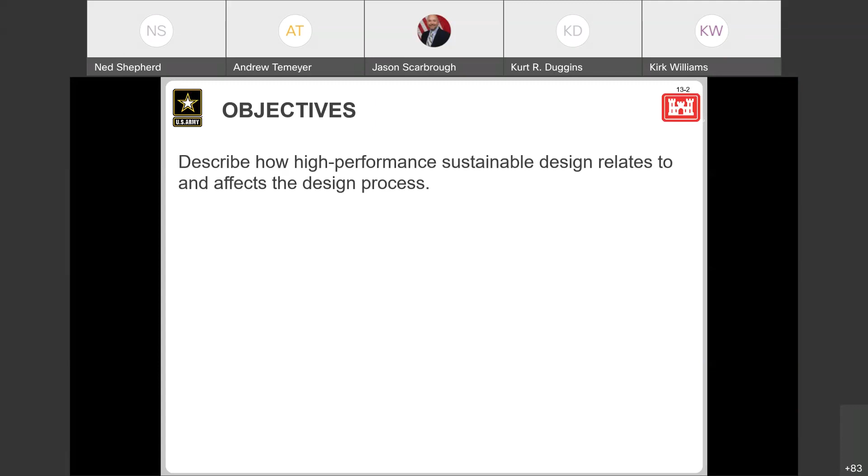As far as resources go, the UFC 1202 is your primary point of reference for requirements and criteria. That references the IGCC, formerly known as ASHRAE 189.1, and then you also have your energy requirements coming out of ASHRAE 90.1. For projects pursuing LEED certification, you have LEED and LEED Online. Then there's obviously also other third-party certification guides and tools, depending on where you're at.

We'll talk about AR 420-1, which serves as our overarching guidance for how we proceed through our design process. It's obviously got an Army focus, but we leverage that basic process on other services as well, like Air Force. There's the Mercy website, which we've talked about before, probably needs some updating, but it does have some good information in it. If you're working on Air Force projects, there's an AFI 32-1023 for designing and constructing military construction projects.

You don't have to be an architect to look at the Architect's Handbook of Professional Practice, but we consistently refer to these design phases as schematic, design development, and construction documentation. Those kind of came out of the AIA long time ago, so if you're looking to relate basic design process and theory, that's a good resource.

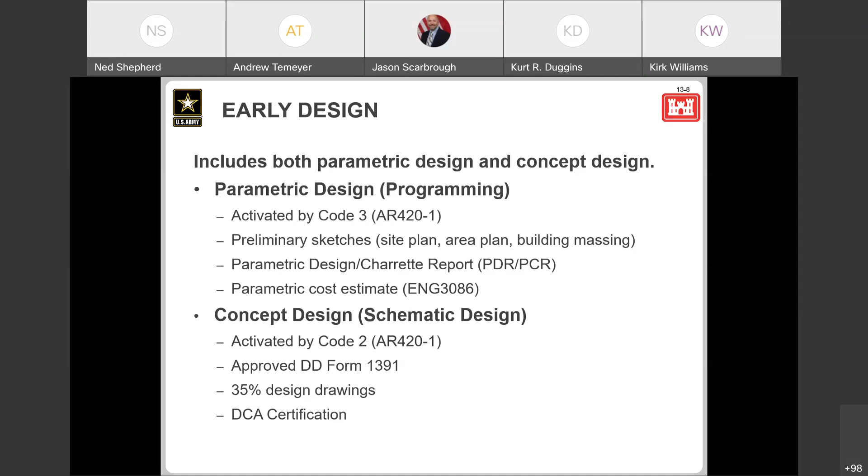When you're reviewing your programming goals, ultimately this is when we refer back to integrated design - we want to make sure that we have a robust and diverse team working on the project. Your programming shouldn't just be done by a project manager, or one person at the base. It should have a robust team, a diverse skill set that can vet and validate all of the project requirements and begin that integrated development process.

Conduct research as necessary to ensure that you have a project site, that you've properly placed your facilities on the site, that you've identified sustainable features and components that may impact your project scope or budget. Begin to think about low impact development and site development, and try to open the aperture a little bit on your project - see what resources are available within or around your project site so that you can make informed and intelligent decisions about how to best develop your project.

Set and prioritize goals. Every project is constrained by scope and budget.

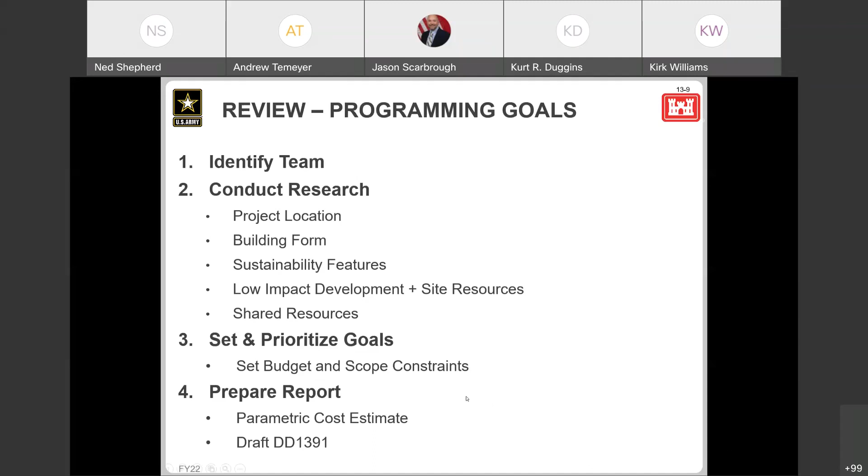When you're kicking off your project, sustainable design features and options need to be a part of the conversation. Here's some of the new, fancy, shiny, big, appealing things that everybody wants to be able to talk about. Everybody wants a windmill on their project, right? I don't know, I'm kind of kidding.

Make sure that sustainability is part of the conversation when you kick off your project. What can you do to reduce your energy consumption at the project level? What can you do to reduce your water consumption? There's easy things like low flow faucets and toilets, and then there's more complicated things like rainwater harvesting, purple pipe, all that type of stuff. So we're not here to tell you what to use or what to entertain or what to consider, but you need to look at your individual projects and generate that conversation as early as possible.

And it's not too early to start the energy modeling process. That's not to say that you have to have a robust Trane Trace model, or I can't remember the other one that we often use, but start looking at it in an iterative manner, working from general to specific, how design decisions impact your project in an energy modeling environment.

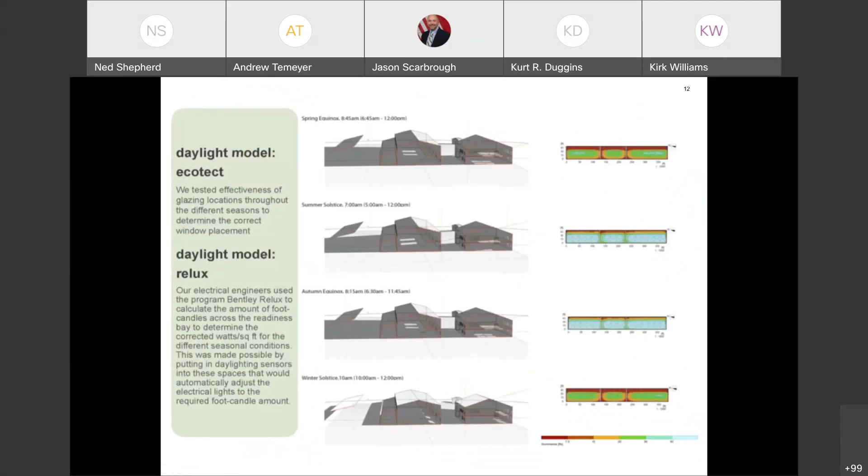Another example of daylighting using Ecotect, which is, I think, a dead software at this point in time, so maybe we need to update the slide.

Start working your third-party certification checklist. This is a LEED version 4 checklist, but most projects, the UFC dictates which projects require third-party certification. Army still is behind LEED, Air Force is not typically, but ultimately start tracking compliance with your third-party certification requirements. UFC is a very strong indicator of what you got to do on your project, but if you need to track LEED certification as well, achieving all of your required credits to get to LEED Silver is not going to be 100% coincident with complying with the UFC.

So you need to start taking a look at this stuff early and figure out where your gaps are, run a gap analysis, and try to establish where you can target credits that get you in the best position for that silver certification, and maybe factor in a little bit of room for error.

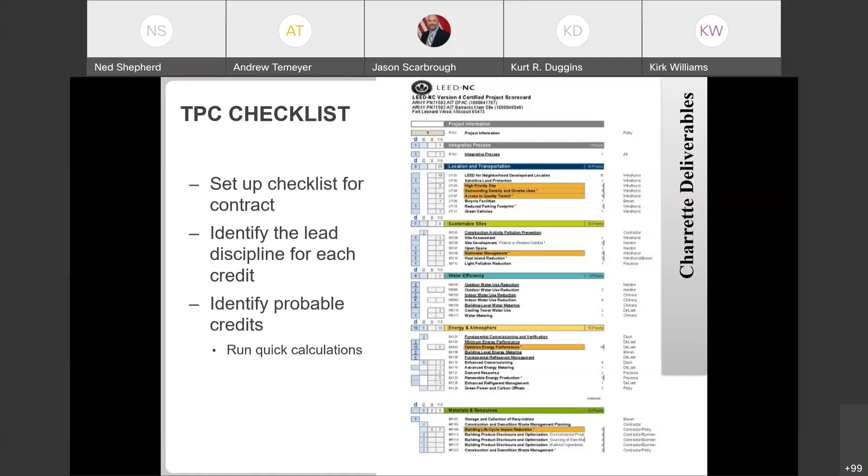Scorecard documentation - a lot of you might know of these as HPSB Checklist. Each service tends to have their own checklist. I think the Army and the Air Force ones are still posted at this link on the Whole Building Design Guide. The Army one is now a PDF, but it's gone through several different versions over time. I believe the Air Force one is still an Excel spreadsheet.

I'd say that the Army one, the degree with which those are being tracked right now is not necessarily what it was in the past. Air Force still pretty consistently asks for them when we execute their projects, but ultimately they should reside with the project files and be available if requested.

When you do your design charrette at the beginning of schematic design, make sure you retain as much of your PDT from planning as you can. Make sure that you're validating your project requirements against the 1391. At this point in the project life cycle, that 1391 is still a draft. Your budget shouldn't be locked. Track down your owner's project requirements. Maybe that's defined in your planning charrette report or your PDR, or maybe it's a separate document depending on the complexity of the project. And then also make sure that you understand your basis of design.

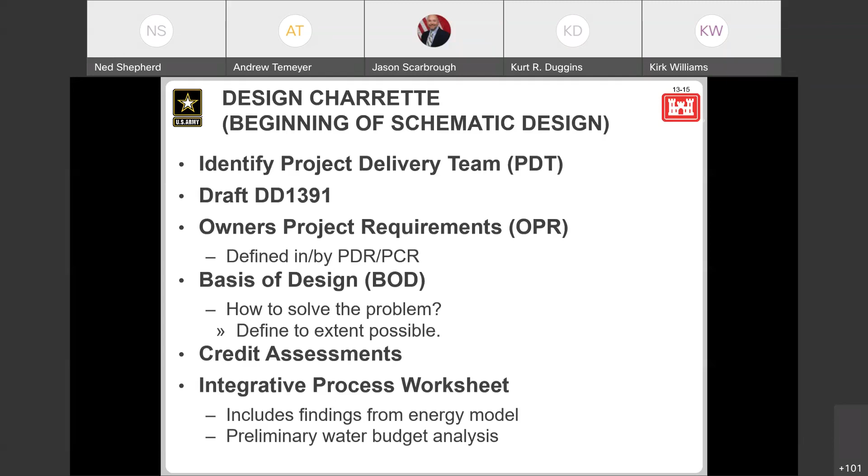Again, identify your PDT. Make sure you can retain as much ownership to that project within the PDT as you can. Make sure everybody has access to contact information. If you're doing an in-house design, that's great - a lot of times people are all sitting next to one another, shoulder to shoulder in the building. But this happened before COVID, and it's even more prevalent now - we work with remote teams across geography across the country, and we have diverse team member sets. So make sure everybody knows how to get in contact with one another. And then declare clear roles and responsibilities. Nothing drags a project in the gutter when nobody knows what their job is and what they're responsible for. Try to be clear with where those responsibilities lie.

We kind of have a couple of hot topics around our district. Who owns editing certain credits, who owns editing certain specs. Make sure that you know who's going to edit your sustainability spec or your sustainability reporting spec early on, so that it doesn't just get forgotten.

You should have your project manager. Make sure that they understand that sustainability requirements are a requirement on the project - they're not an option. Do what we can to make sure that they have the ability to communicate with stakeholders outside of your organization, and then provide them with the analysis and tools to help execute on project requirements.

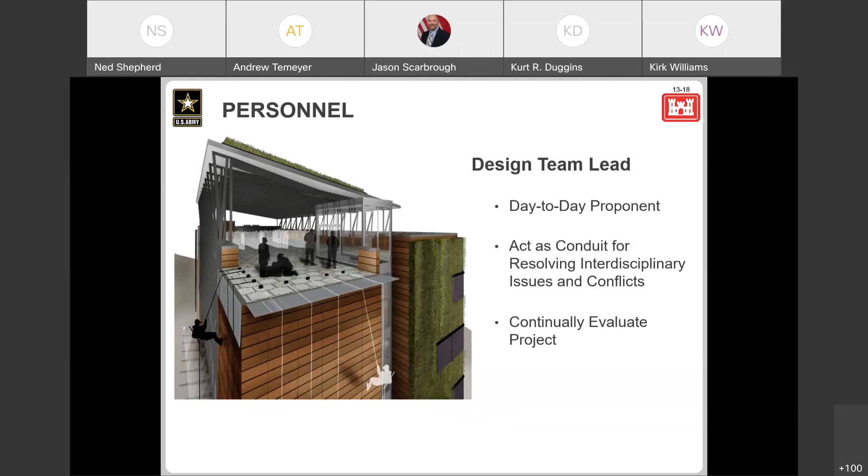I think sometimes this gets forgotten about. Make sure your design supervisory structure has an awareness of sustainability requirements on your project. Ensure that they have the best understanding. A lot of first-line supervisors may not be in the weeds on compliance with ASHRAE or compliance with documenting third-party certification, but it's an important part of the project. It directly relates to project success, and if your supervisory staff don't at least have a basic level of understanding of these requirements, it increases the risk that the quality of how you're going to deliver on that. Number one, it's inconsistent. Number two, it increases risk that you miss expectations. So do what you can to include sustainability compliance as part of your quality control procedures.

Review your energy model. Review any third-party certification templates or documentation that you've completed. Make sure that stuff is being done early and is being maintained, rather than forgotten about again until the last minute.

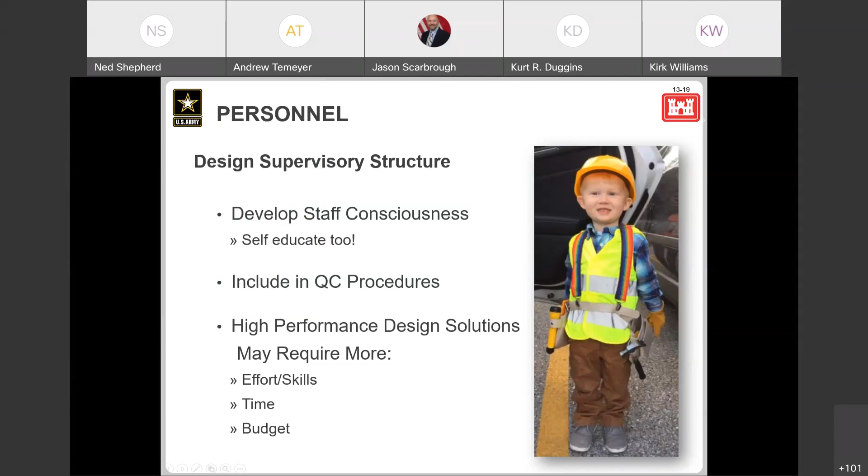But if you develop your project design at 35% to an industry standard level, that's defined by this AACE RP 56R08. You develop your cost estimate to that same standard, and then conduct, at this point I think it's all MILCON projects, FY24 and beyond, a cost and schedule risk analysis consistent with AACE RP 41R08. That allows the budget owner, the project owner, to go to OSD and adjust their project budget.

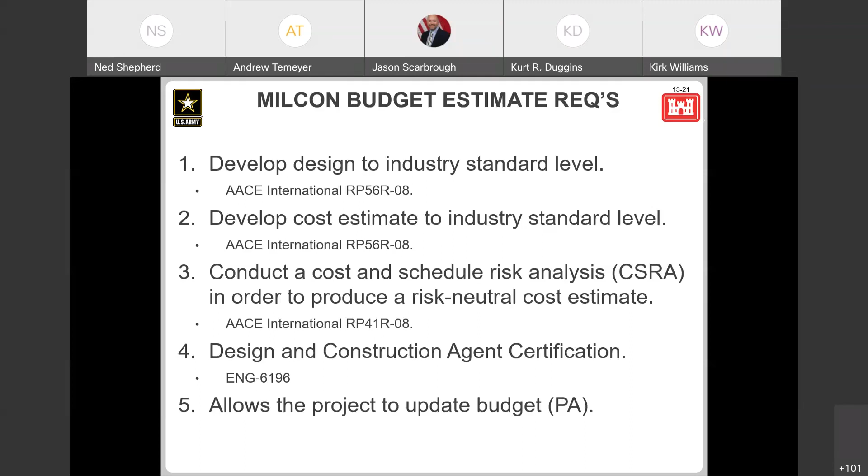But ultimately, make design decisions early. Start thinking about how your design decisions are going to integrate with other systems, and start running some interference on that. Think about, this is an example, but how wall color may impact your lighting strategy, how that may impact your mechanical room or your mechanical design or your mechanical room solution. Think about, in this case I think we're looking at a wall, how we're going to insulate it, and how electrical system routing and infrastructure can be installed within that wall assembly, and whether that has an impact on the thermal performance of your project.

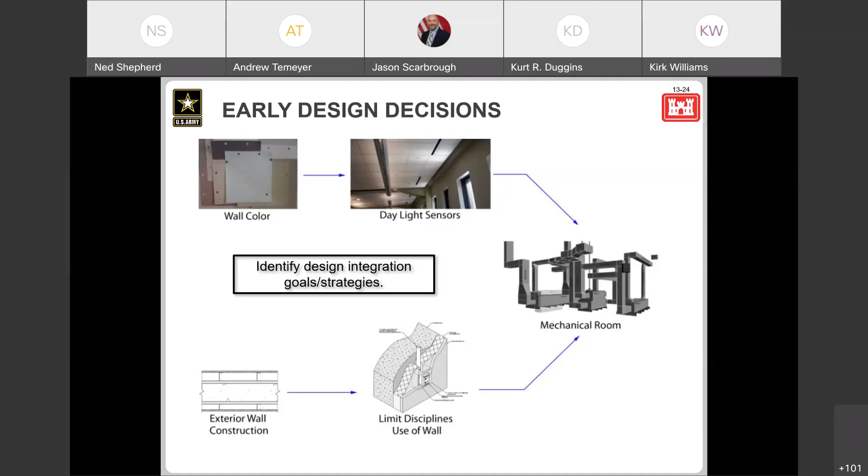Here's another example of an integrated solution: solar tubes. We've used these a lot within our district, but they provide a fairly cheap way to deliver daylight into spaces that otherwise may not have good opportunities for things like skylights, clerestories, or big walls of translucent or transparent fenestration.

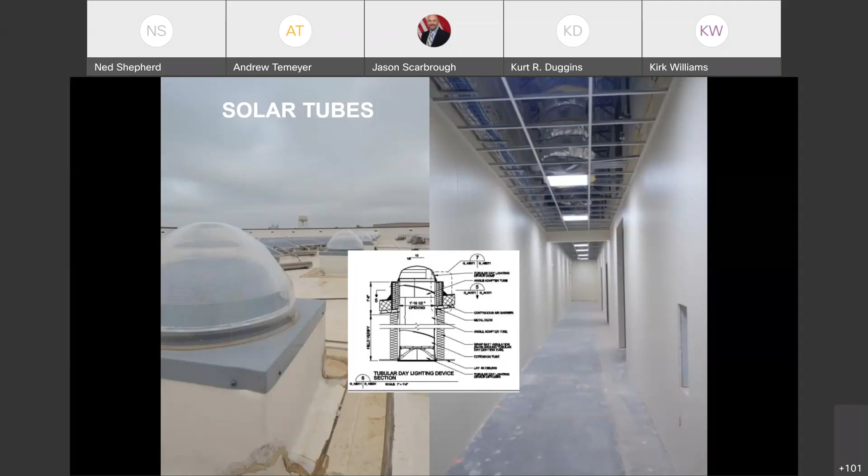All right, so as you wrap up schematic design, you should have your record card, your design drawings, and a design analysis. Your sustainability analysis may be part of your design analysis, but make sure that you're starting to document all of the commitments that the team has made in meeting minimum or life cycle requirements, and include any life cycle cost analysis that backs up your decisions.

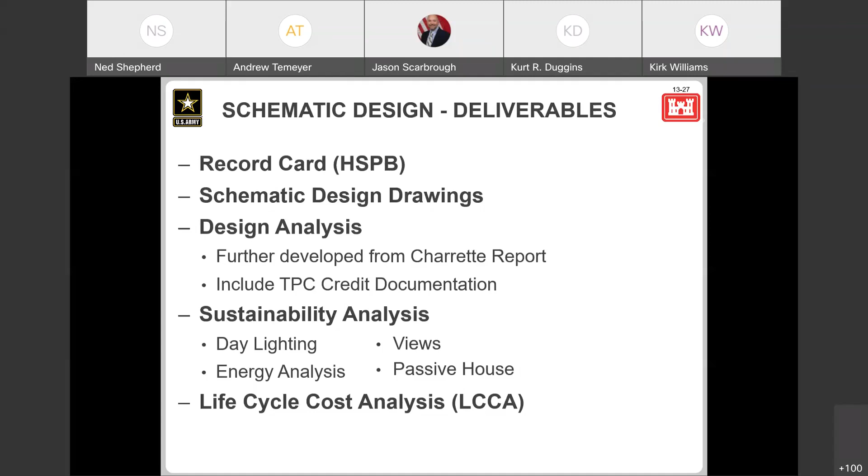Okay, so that puts us—I don't know if you guys can see my cursor very well—but that puts you right at, that puts you at the middle, or end, of your design year. That's where you're going to complete your DCA certification. Hopefully, if you did everything correctly, your service is going to be able to adjust their budget and set your project up to have the right amount of scope and money backing it.

That gives you actually a fairly luxurious timeline to awarding within your program year. That means that for design development and construction documentation, you usually have about an entire year or more to work the remainder of your design. Obviously, all of this is contingent on your acquisition strategy. I believe the OSD reporting requirement is the same whether you go design build or design bid build, but your remaining design phases may change from here on out.

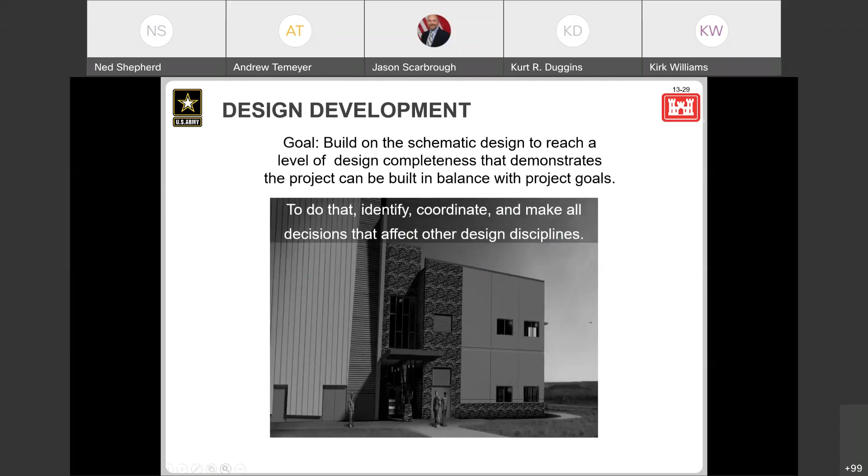Okay, so design development. Your basic goal during design development is to build your schematic design from a set of goals and a set of analyses into a coordinated solution that you can build, and run all of the coordination and interference checks that you can during this phase to ensure that you can produce a reliable set of design documents.

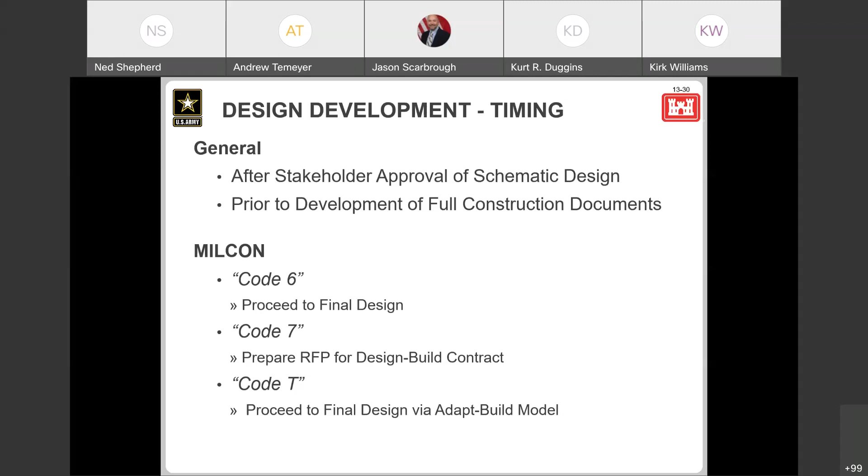As I was saying, this would typically be activated by a Code 6 for a 100% design or a full design, whether that's AE or in-house. Code 7 would be for design-build RFP, or Code T would be for an adapt-build methodology. But ultimately, your path to a construction contract award will obviously be different from this point forward, whether you go design-build versus design-bid-build. But ultimately, we're still going to be tracking similar goals.

I think it's important to say or be open to the idea that high performance sustainable design is more work than what we'd maybe label a non-high performance design methodology or process. The whole idea is that we spend a little bit more time in design to yield long-term payback for a life cycle cost-effective facility. That puts a burden on the PDT, everyone involved, whether you're doing design or project management, or maybe you're on the owner-operator side of the table. But ultimately, I think we have to be willing to say that out loud. That may mean you have to make difficult decisions on what you're going to focus on. Maybe your design budget isn't going to increase, but ultimately we have to be willing to figure out how to deliver on these requirements, knowing that it may require a little bit more analysis or effort to yield a successful outcome.

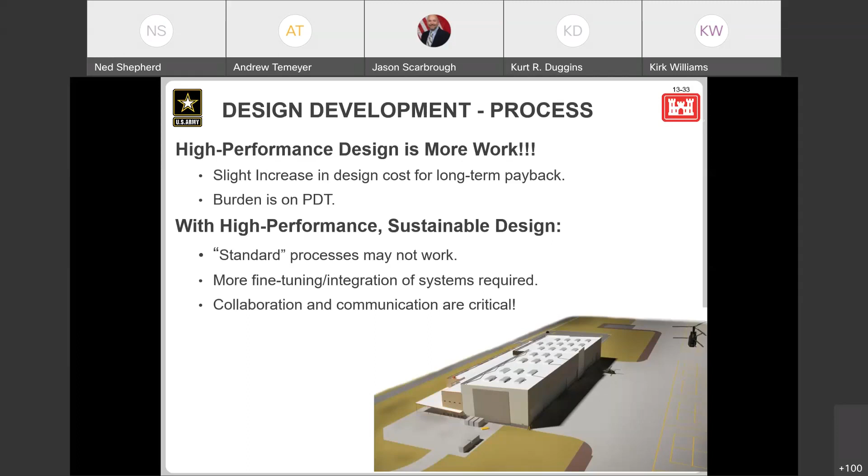Cycling back to the topic of integrated design, figure out what tools and resources may facilitate this collaboration process. Within Omaha District, we have a space labeled the BIM pit. It's not used as often, frankly, now that we have all of these virtual coordination tools, but figure out ways to get your designers in the same space, whether that's real property or virtual, and actively work coordination on your design.

Figure out, again, back to BIM, is BIM the correct tool to facilitate that? I would argue that it is, but there's all kinds of tools and resources out there available, and depending on what you're attempting to coordinate, use the best tool for the job.

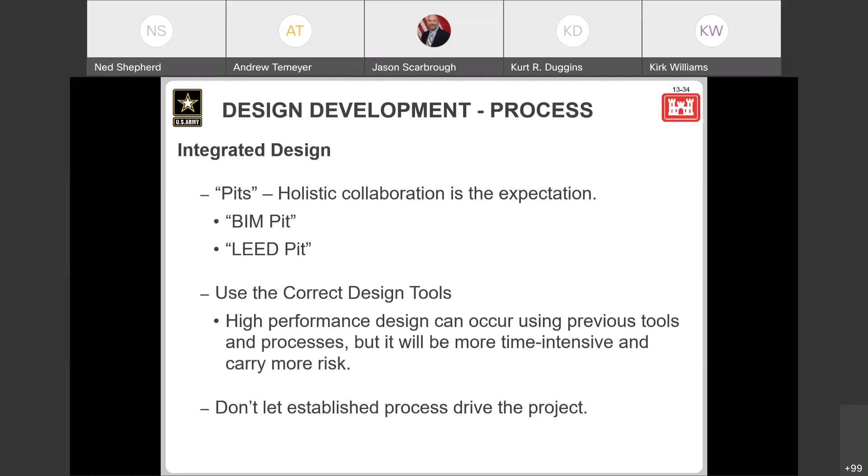We already talked about BIM. I think most districts at this point are probably using BIM, whether that's a Bentley or an Autodesk product. This is not a sales pitch for one piece of software or another, but again, the whole concept of BIM is that you're modeling a facility in virtual reality. I think it's pretty well understood at this point in time that utilizing BIM typically requires a pretty front-loaded effort, similar to the entire process that we're talking about, to feed that environment with all of the inputs that are necessary so that you can facilitate an integrated and coordinated design process.

I think depending where you are in adopting BIM within your district, you may feel like the payback isn't there, but I think the more and more that you learn how to take advantage of the BIM process, you can start to realize benefits on the back end for reduced errors and omissions, for opportunities for, I don't know, use a flowery word, synergies in design detailing or design systems or in systems coordination, things like that.

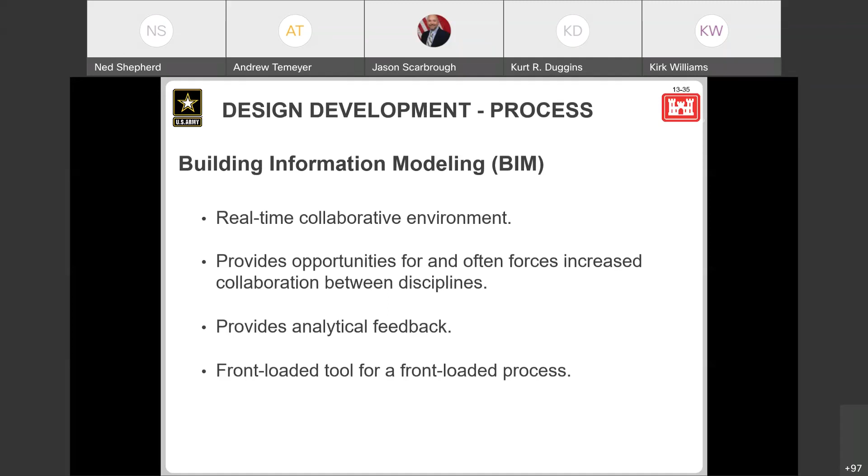Okay, so you're going to circle back to our energy modeling. You're going to finalize your concept models, start working your compliance models. Those may or may not be developed within the same systems. The same people may not be responsible for those. Not going to dictate who those are, but all of a sudden you're starting to transition focus on using energy modeling to make design decisions, to facilitating energy modeling to show compliance with all of the requirements that we've established.

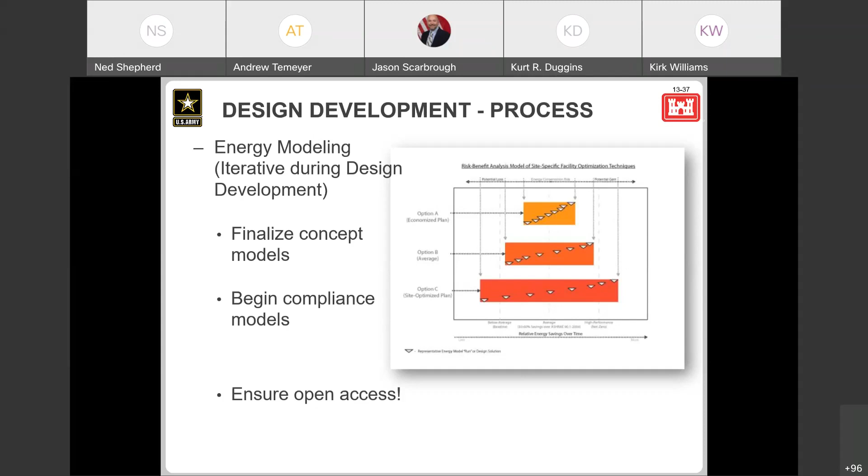And try to make sure that those models are available for the entire PDT, whether that means it's outputs or summaries or tables or whatever. Make sure that the whole team understands the inputs that are going into those so that they're as accurate as possible.

Design development, I think with the increased focus on high performance design, it's worth asking the question, how do we present the work we've done? I sometimes feel like you can go through this whole phase, do a huge amount of coordination, make a lot of decisions, and then you find yourself burdened with, oh, I'm trying to meet my standard 65% design deliverable requirements. And I don't feel like I'm there yet. You just put all this time into building a BIM model, but you don't feel like you have the correct output.

Again, not here to dictate what your deliverables are, but I think it's worth thinking about, and maybe drawings specs and a DA aren't the best ways to communicate that. How do you reconcile the expectation for what everybody considers to be a standard 65% deliverable versus giving the PDT and your stakeholders the best information they can have to show what you've done in order to meet their requirements?

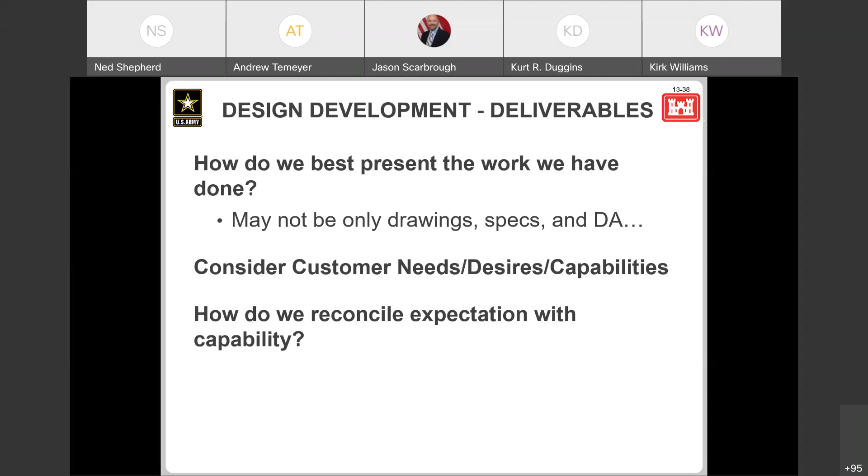If you had to put a finger on what your standard deliverables would be, it's probably a cartooned construction document set, so you're getting a handle on how many sheets you need to communicate what you need to communicate. You're starting to pull individual specifications, compiling and editing them, and have a design analysis that addresses all your sustainability requirements. You're starting to select features and products or performance requirements for products that go into your project, and then updated scorecard or HPSB checklist.

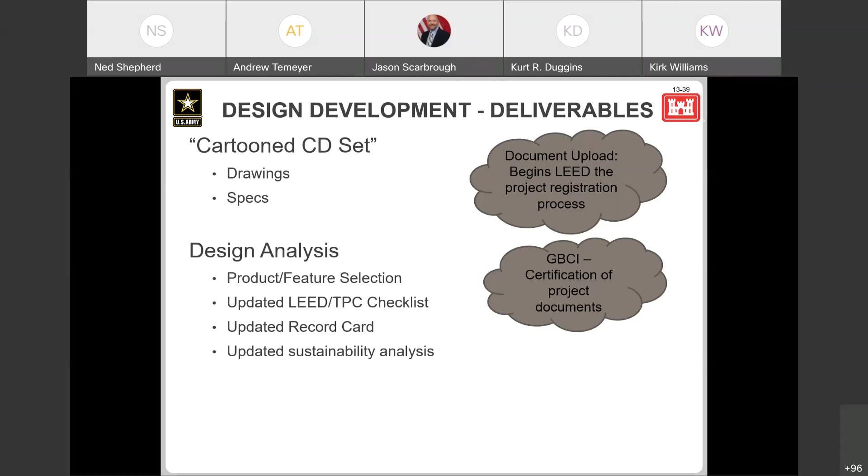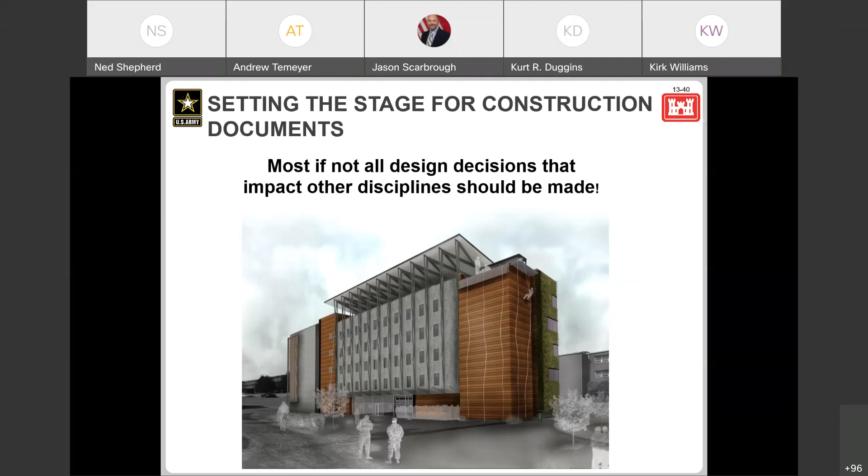The overarching goal through design development is that you're making all of your design decisions that impact other disciplines during this phase. That translates into, as you transition into construction documents, the construction documentation goal: compile and complete contract documents with enough detail that they can execute a construction contract. This may seem overly simplified, or completely unrealistic depending on your perspective, but ultimately the goal is by the time you hit CD phase, you're drafting. Obviously you'll always have little things that come up to coordinate, but you don't want to be rethinking strategies at this stage.

This is about trying to stay in your lane as much as you possibly can, and reduce the amount of coordination required at this phase, because going back to that cost impact curve, it's much more difficult at this phase, and you're going to have higher proportionate costs to make changes here than if you would have made those decisions earlier.

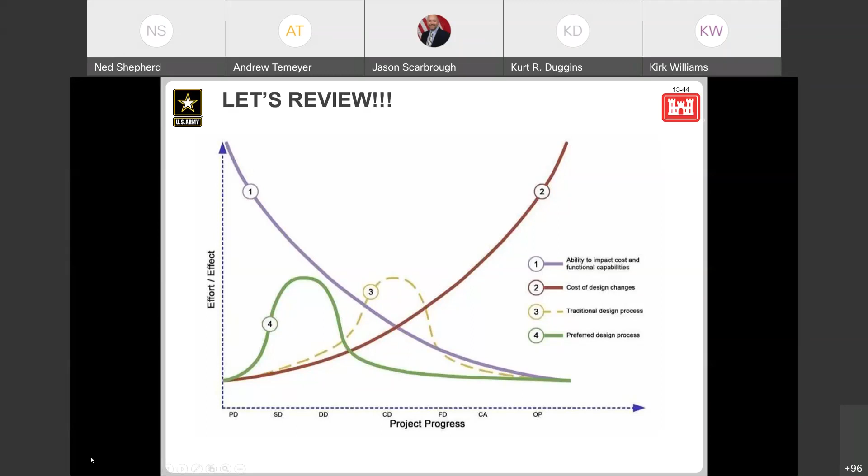Any remaining coordination would be within your discipline. So, deliverables: you need drawings, usually delivered by a combination of BIM, building information modeling, CIM, civil information modeling, and or CAD.

You have specifications to include all of your sustainability specifications. One of the key ones is 013329, with submittal register and attachments that properly communicate your sustainability, commissioning, and third-party certification requirements. You complete your sustainability documentation, making sure that's either part of the design analysis or a separate attachment.

One thing that always seems to be a last thought, but I think is really important for sustainable project delivery, is instructions to field personnel. Make sure you communicate in your design analysis, or separately, what unique systems or features are going to require additional consideration during construction. Sustainability sometimes means we're considering alternative systems that may not be considered normal or require a little additional oversight during construction. This is where you want to let your field personnel know, your resident offices and such, that they need to take a little more care or scrutinize those systems or features so that your holistic design intent is executed properly.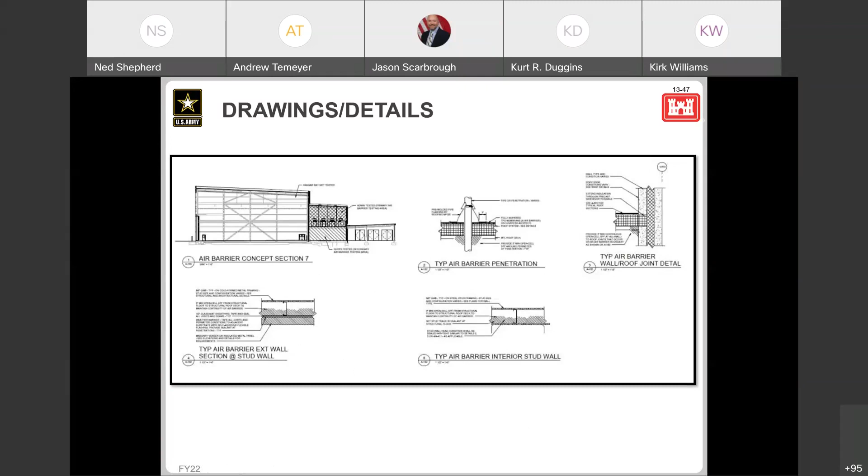Some examples of drawings and details, nothing sacred about any of these, but these were air barrier related. How do we properly communicate air barrier boundaries and detailing? In this case, we were trying to show where different boundaries in section occur within the project, and then tie those back to typical details on how to apply or establish your air barrier boundary. Again, nothing sacred about these details, but trying to communicate intent for continuity of insulation.

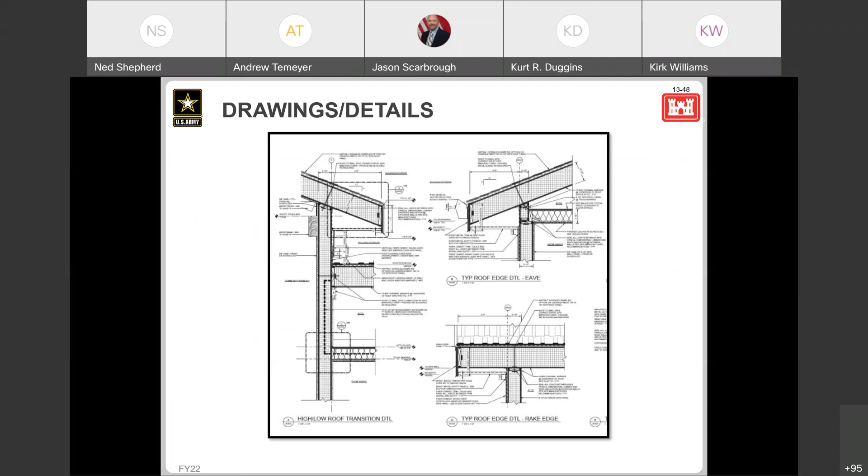On your specifications, I think there's a lot of value in communicating intent to make sure your sustainable goals are achieved. It's sometimes easy to write a performance specification, but think about whether somebody who doesn't know the amount of effort you've gone through to coordinate something understands what you're trying to do. If that's not clear, figure out how to communicate it, whether that's a drawing or additional language. If the best you can offer is an intent statement, figure out the best place to state it and get it in the contract documents.

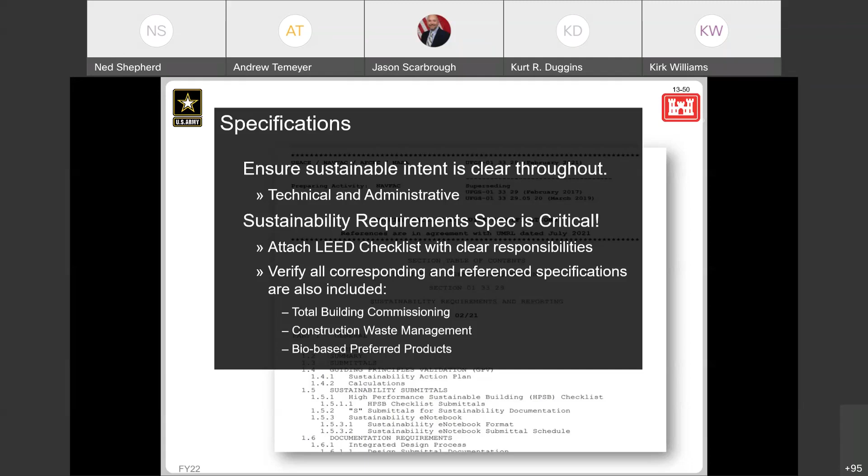May not be the most enforceable thing in the world, but it's better than nothing. Make sure your specs include your LEED checklist if your project has to pursue LEED, and make sure you have all your corresponding reference specifications. I think bio-based products is now part of 013329, possibly also construction waste management, but total building commissioning is definitely a standalone spec, and that needs to be edited to your specific commissioning requirements on your project.

When you're editing your sustainability reporting spec, make sure you identify who your third-party certification entity is. Typically it's going to be LEED or GBI or GBCI, but it could be a variety of other entities, or other strategies could be required depending on who your project is for.

Clearly identify if there's, say, credits in LEED that the contractor is responsible for. Make sure they understand what's their responsibility and what may be the AE's responsibility or the Corps' responsibility. Attach the checklist to your contract, and then also attach your HPSB checklist because that needs to be maintained through construction.

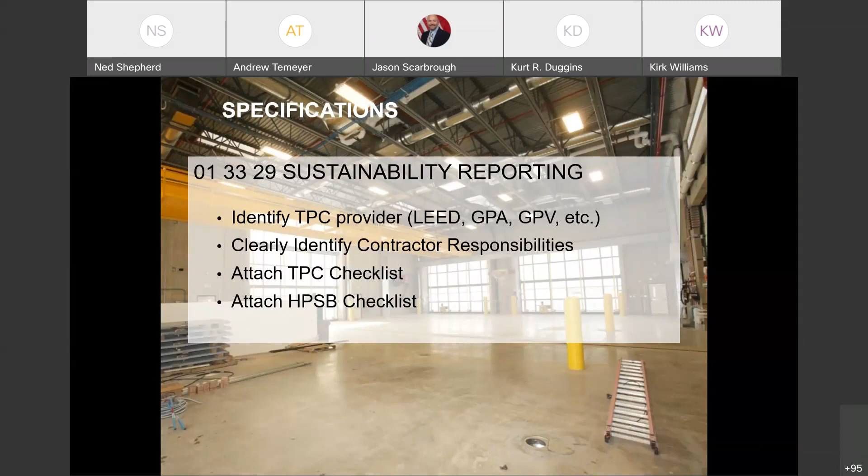There's different ways that you can address submittals in your specifications. Sometimes we include a statement in our material specs that talks about, hey, this project has sustainability requirements—see your sustainability requirements spec for more information. There's also the S submittals designation. I know we've talked about that as somewhat of a controversial thing from time to time, but the UFC technically requires it. And the S designation, for those that aren't tracking, is where you designate a submittal to be part of your sustainability notebook.

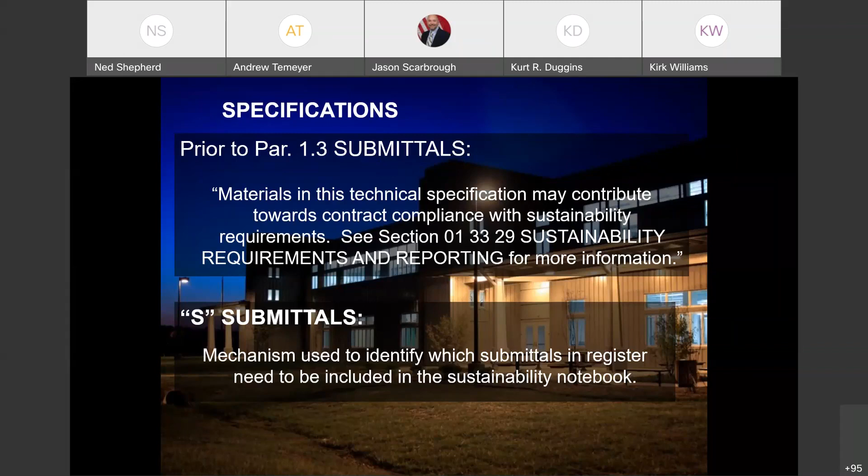During construction documentation, make sure your design analysis includes descriptions of all your sustainable systems. Make sure your intent is clearly communicated. The contractor is typically not going to see your design analysis, but maybe your field personnel will crack it open, and it'll help document where you guys were trying to head with a system or a strategy or a feature of the project, and then describe how systems need to coordinate with one another, if that's applicable.

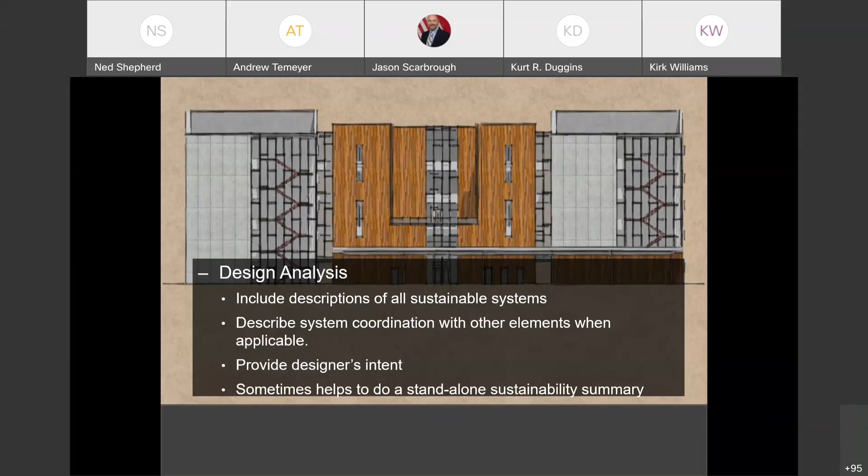I know air barrier installation and detailing always seems to be—it doesn't matter how many drawings you draw, there's always going to be one-off conditions, and those are things that are going to have to be coordinated in the field after the fact. I'm sure that's the case with all kinds of other engineered systems. And that can, again, be manifested in instructions to field personnel.

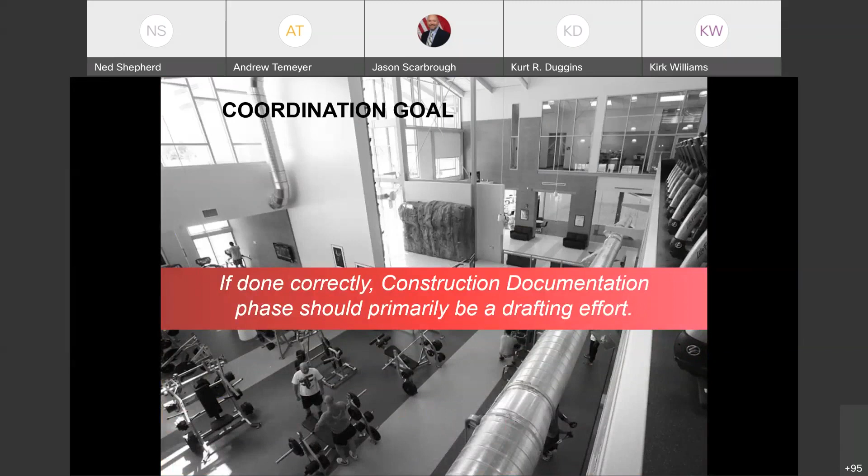Coordination goal—we've talked about this before, but if done correctly, your CD phase is a drafting effort. All right, so that gets you all the way through your budget year, and that puts you in a position to solicit and award a project early in your program FY.

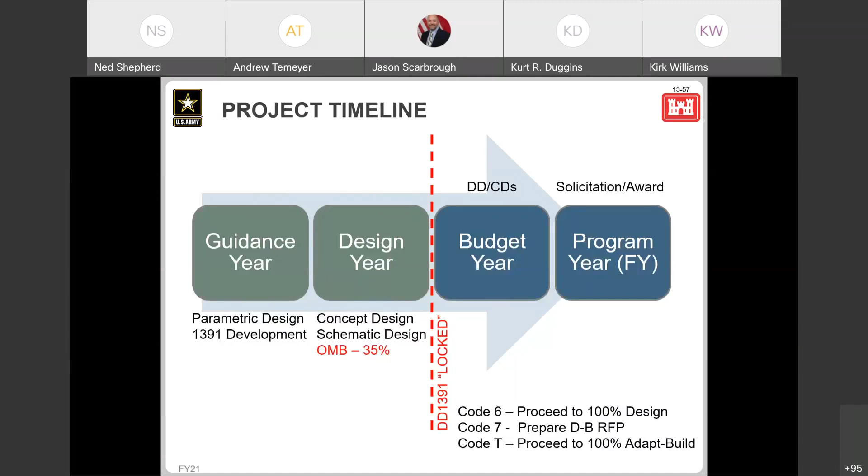So familiar quotes from construction documentation phase, just a little bit tongue-in-cheek: I don't want to, I don't know how to. You start to see a lot of excuses. Everybody's feeling the pressure of getting a design kicked out. How do you begin to address these things?

You're running low on design funds. I think it's really important to emphasize that our industry is continually changing. The way that we deliver projects and the way that we specify things and the level of effort with which we detail or go about contracting things should respond to how our entire collective environment is changing. So, do you need to draw that roof detail?

It seems more and more we're specifying roofs as almost a performance spec anymore, for basic roofs. Do you need to draw every single parapet condition? Are there details that you're drawing that take time but provide minimal effort? Could that time be spent conveying intent or specifying something else?

I'm not here to arbitrate or defend what you should or shouldn't do. I think it's important to think about that as you put pen to paper or click a mouse. What value, instead of just drawing the easiest detail, does that detail provide in delivering a functional facility that meets all of your requirements?

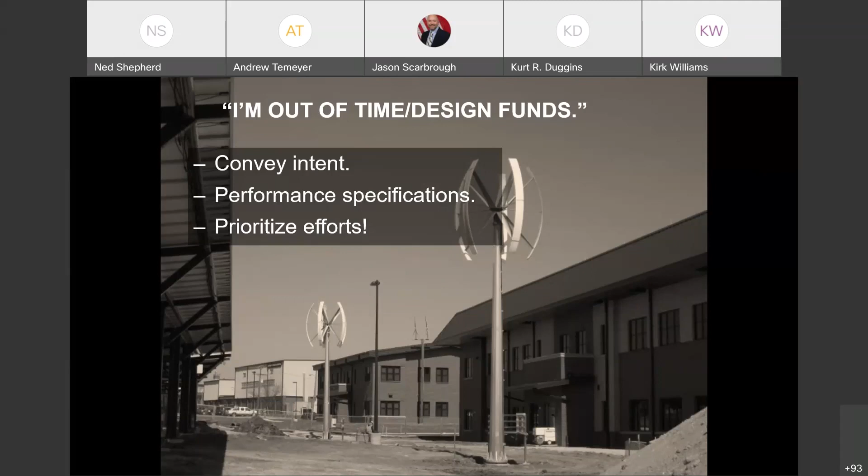Here's another one: we can't do X on this project because—well, that maybe sometimes is stated rhetorically, but I think it's important to ask the question. If you feel like you're being constrained for a reason, make sure you ask somebody else, somebody that has the potential to influence the way that you go about doing that stuff.

Look for opportunities. If you don't have expertise within district, look for opportunities for inter-district coordination. We have a lot of resources throughout the Corps, a lot of people that know a lot of diverse and unique things. See if you can figure out who may be interested in helping your projects succeed where you're facing challenges.

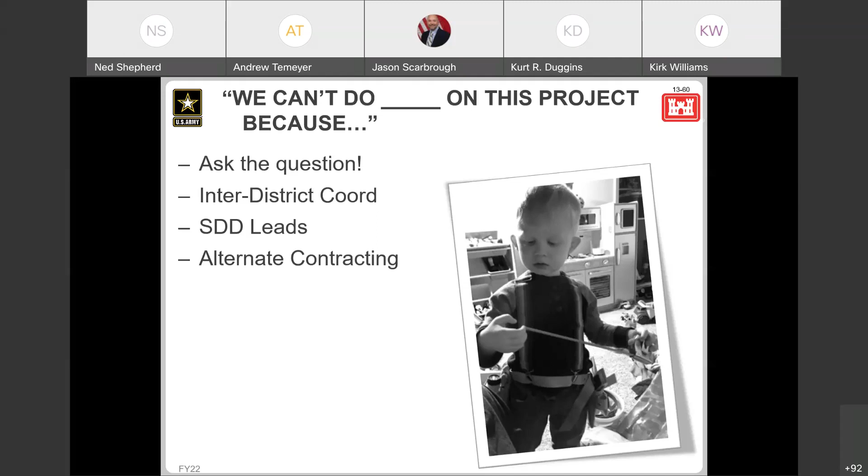Work with your SDD leads, your sustainability leads within your district. Not only within your district, but maybe start with your division, and then you can work up from there. And then also think about alternate contracting strategies. What are ways to incentivize meeting your project requirements that don't just fall within the exact same contracting methodology you used on the last project? Maybe you do that slowly and iteratively over time, project by project, but don't turn off the idea that you can incrementally improve on the way that you deliver your projects.

Here's another fun question. Why are we focused on LEED when the project was underfunded and poorly scheduled in the first place? Well, I don't want to oversimplify it, but it's a project requirement. It's part of the DoD building code as defined in the UFCs. If your project triggers that threshold for requiring LEED or third-party certification, it's just as important as compliance with the rest of the UFCs.

And so this all ties back to a focus on high performance design and delivering high quality facilities for the military, or other partners, so that they have the best facilities that operate over their life cycle, not the best facilities that operate the first 2 or 3 years of the project. Taking a different approach to defining the bottom line for your project, it includes the entire project life cycle, not just your first cost.

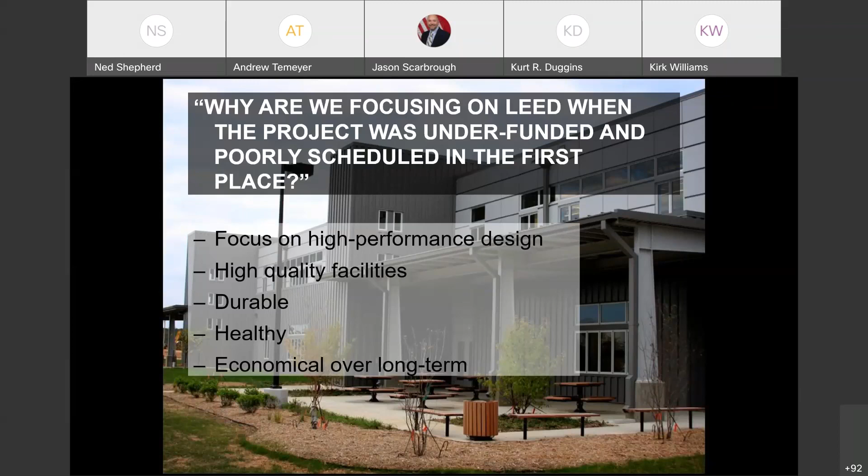All right, so that was a lot. I think we have a couple of comments up here. We have a few minutes, but ultimately our goal today was to describe how high performance sustainable design relates to and affects the design process. We're trying to follow through on the goals that were established when we planned the project. We're investigating design intent early and at a high degree of investigation early on, so that when we get later in the project, we can retain compliance with those goals.

Use the OSD and the DCA process through the LORD memo to your project's advantage. If you hit those milestones, the chances for you being able to adjust your budget at 35% design are certainly significantly greater than if you don't hit those targets. Identify and coordinate interdisciplinary design features during design development to minimize the amount of coordination required when you're trying to crank out a set of contract documents. And then as you hit construction documentation phase, make sure that you enforce your sustainability requirements and goals in your contract documents.

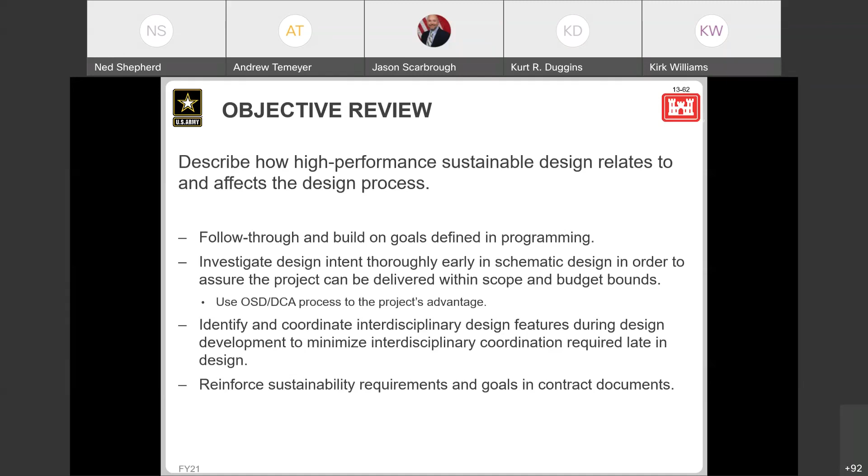All right, that was a lot. Ned, I don't know if you've been tracking any questions. There's only one question that's come up in the chat, and I'll get to that in just a second.

But I did want to add the very last point you made. Why do we have LEED when the budget's all way out of whack and so forth? Originally, sustainability, not just LEED, was all about the environment and the need to do that, and sometimes the environment was shortchanged because of budget or because it was an important project or this or that. Sustainability then extended into being about the occupants, or the human factors, the people within. And when you boil something down to a cost factor, if you look at just the occupants and consider a very small fraction of 1% of their productivity, typically called white collar productivity, which is very hard to track, that'll not only pay for the sustainability, but the whole building many times over the life of the building.

So if we do a good job on sustainability, and you can look at each of the individual factors, whether it's in the guiding principles or in LEED, the idea is that we have not only a more productive workforce in the building, but altruistically, the workforce is better off. And with that, sorry about getting on the soapbox, but that's something I've come across many times in my career anyway.